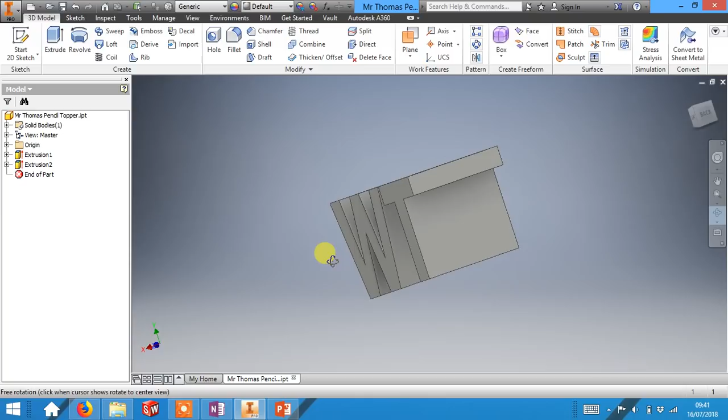What we're going to do now is look at creating a new sketch and another circle which we're going to extrude backwards as the hole for our pencil to sit in when we 3D print it.

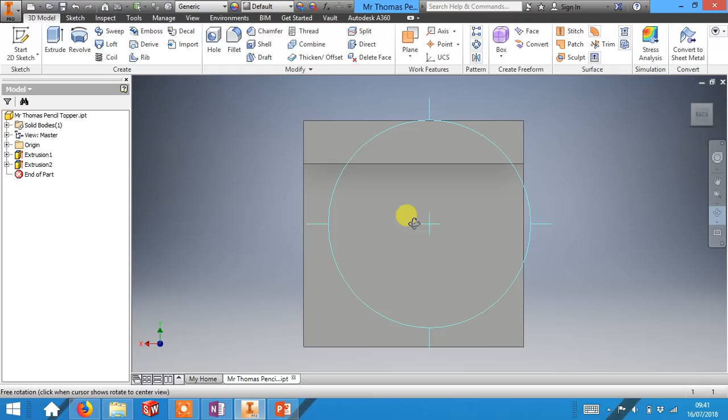To do this, I'm going to select this face, the back end, the same one we used last lesson for creating our cylinder that goes through our letters. I want to start a new sketch by selecting this face. Just like we did last time, I want to create a circle in the center. To do that, create a line from one corner to the other. Remember, where the green dots appear, they're the very edges. Don't forget, you can right click and go OK to finish the line.

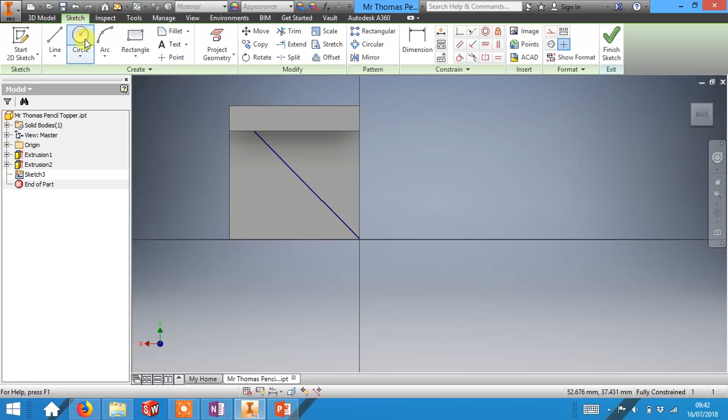Then we're looking for where it goes green in the center, and we're going to drag our circle out. This time we're going to make an 8mm circle. If we finish sketch, we can then just drag it around so we can see a slightly different view.

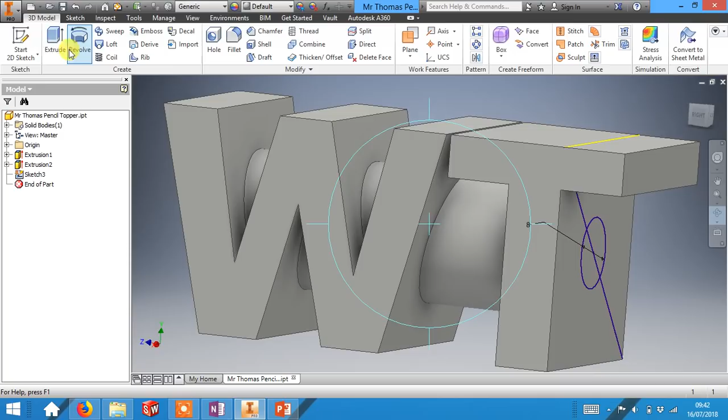We're going to use the Extrude Tool again, but this time in a slightly different way. If we create it like this, it always adds material. If we select the next one down, which if we hover over, makes it into our cut.

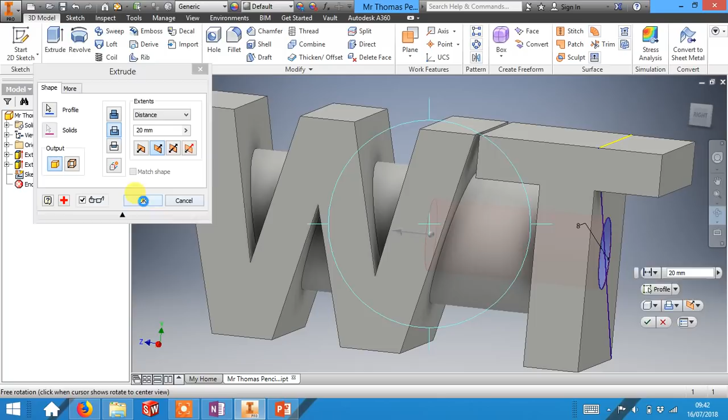This time I'm going to set this to 20mm. Notice I don't want to go all the way through, otherwise the pencil's just going to slide right the way through the pencil topper. If I then click OK, you can see that we've created a hole that goes right the way into the middle of our pencil topper, but not right the way through to the other side.

Now what we can do is try and make our pencil topper look a little bit nicer. To do that, we can have a go at playing around with the fillet tool. What this does is take these edges that are currently quite sharp, and it smooths them off, it rounds them over. To do this, I'm going to select the radius of this to be 1mm.

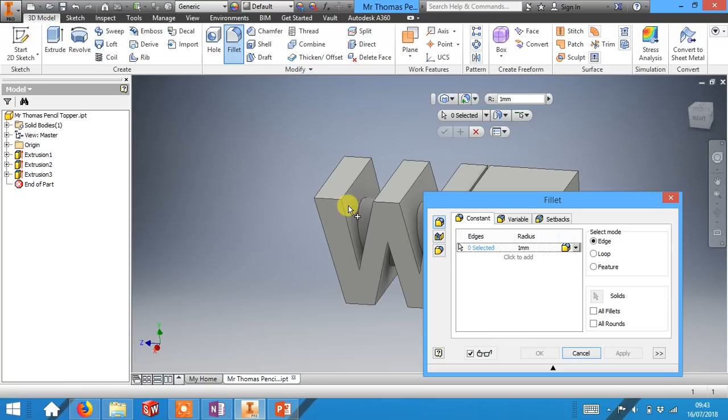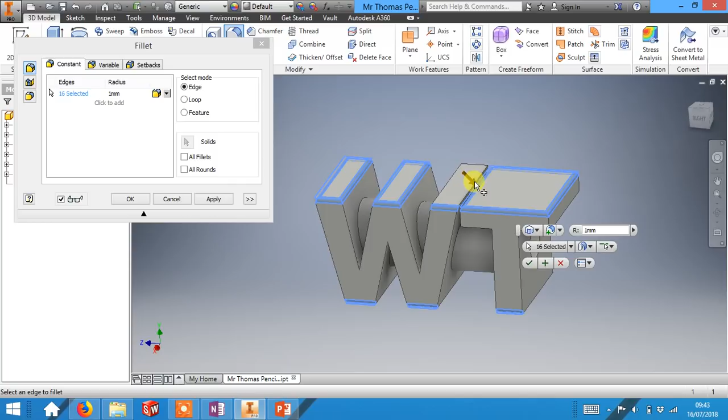If you select, you can now choose a few, and don't forget you can move this box around just by dragging it. Select a few different edges, and you can start to round them off. If you wanted to, you could select all of these top edges, for instance. If you then click the tick, it'll finish it and round them off quite nicely, making the edges a lot smoother.

Feel free to have a play around with this, trying to smooth off different edges of your pencil topper. As soon as you've had a go at doing that, we now need to save and export your pencil topper file. To do that, first of all, we're just going to save your work. This keeps your Inventor part file ready if you do need to edit it next lesson.

To export it, we need to change it into a different format so that the 3D printer can understand. To do this, we need to go down to the Export button and CAD format. Now, for our 3D printer, we need the type to be an STL file. This breaks it down in such a way that our 3D printer can understand it.

Then, we need to make sure we go to Options and make sure that this unit section is in millimeters. Otherwise, you can end up with a pencil topper that's either way too big or way too small. If it is in millimeters, just click OK.

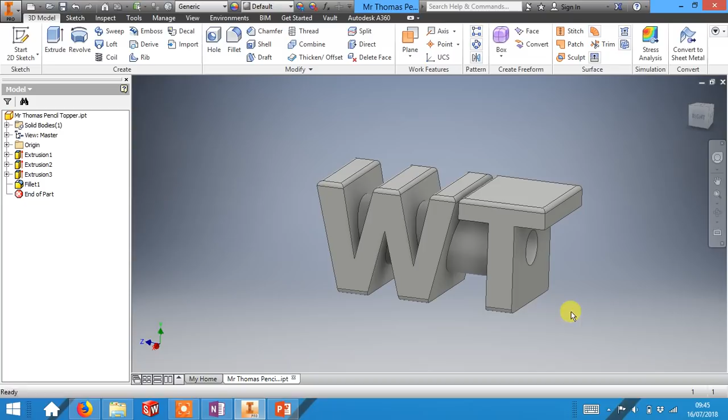Make sure that it's your name and pencil topper as a file name. For now, we're going to save this into your technology folder. Your teacher will then tell you how to send it to them, ready for 3D printing. As soon as you've done all of this, you can just click Save. This now means that your file is ready for 3D printing. Don't forget, it needs to be sent to your teacher, but they will update you on how to send it to them. Now, you're all ready to go.